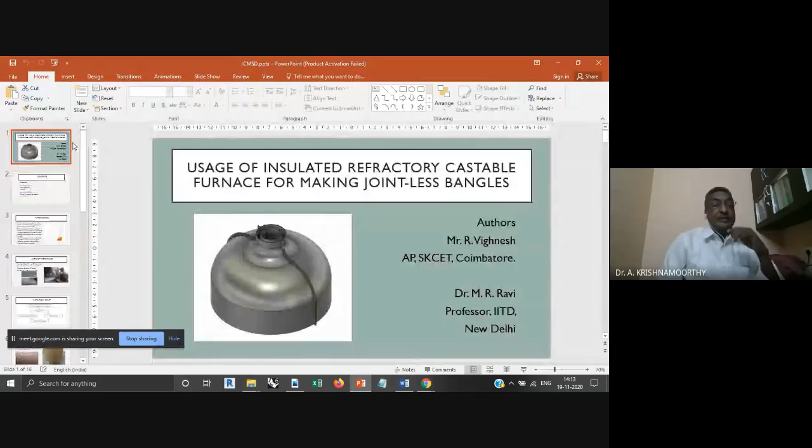Usage of insulated refractory castable furnace. Okay, so can I start? Please proceed. Good afternoon, everybody. My name is Vignesh, and I'm an assistant professor working in Sri Krishna College of Engineering and Technology, Coimbatore. I'll be presenting my topic on usage of insulated refractory castable furnaces for making jointless bangles. I've done this study along with Dr. M.R. Ravi from IIT Delhi.

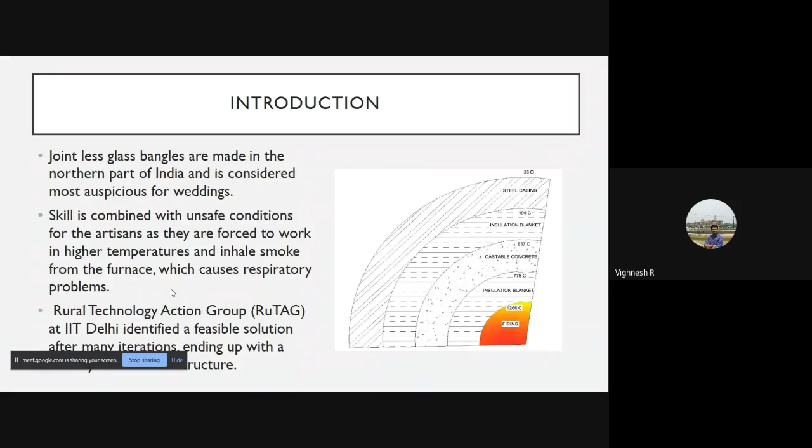So the introduction. Bangles are used in wedding ceremonies, which are considered to be really traditional in the northern part. In the northern part, they make jointless bangles, which require more skill compared to the jointed bangles that we see every day. These are made of glass. The problem is it requires more skill, and it has difficulties in terms of the temperature which comes out of the furnace, and also the gases that they inhale from the process.

So those two things were really hampering the efficiency of the artisans who make the glass bangles. So RuTAG, a body in IIT Delhi, identified this particular problem, and they also came up with a solution for making the life of the artisan a little better.

So they came up with this solution called a furnace, a 4-layered furnace, which is used to make the bangles, but the furnace will not let the high temperatures come out of the whole apparatus, and also the flue gases will not be coming out, so they won't inhale it. So that's the whole idea.

They have done it with 4 layers, as you see in this photograph that I've given on the right hand side. So the 4 layers consist of these things. Insulation blanket was the first and the third layer. The refractory castable concrete was considered to be the second layer. It's actually concrete. So the fourth layer was steel casing, which housed the whole apparatus.

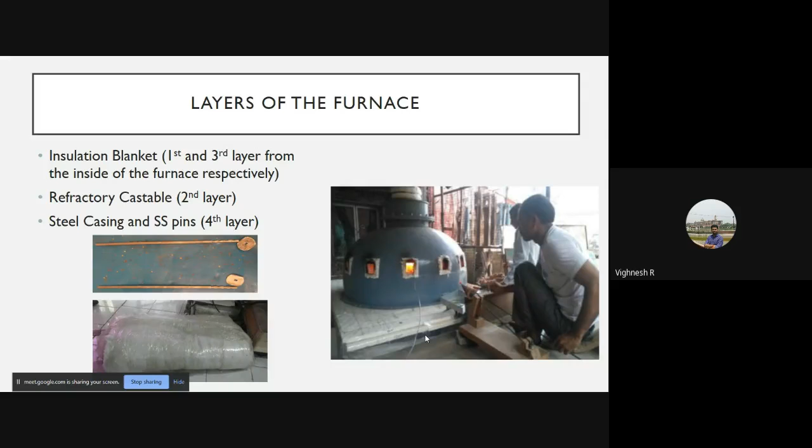That's the first idea. We have a literature review which was done, covering the iterations which were made, and then we started and we selected the materials. We did the analytical testing, physical testing, and I will discuss the design and discussions right now.

So the first thing which I talked about was the field visit to Khurampur. Khurampur is a village in Haryana. So IIT Delhi, along with its professors, came up with this solution for making pottery and all that. The problem with this was it was made up of natural materials. Natural materials did not have the capacity to resist high temperatures, and this resulted in cracks over the walls

that you see over here. So in order to reduce the cracks, they came up with another solution to fix steel wires all around. But that again proved to be a fatal mistake, because we have studied in temperature loading that if the material is free to expand or contract, there is no stress on it. But if we restrain something, if we put a fixed end on both sides, then stresses will come out of that.

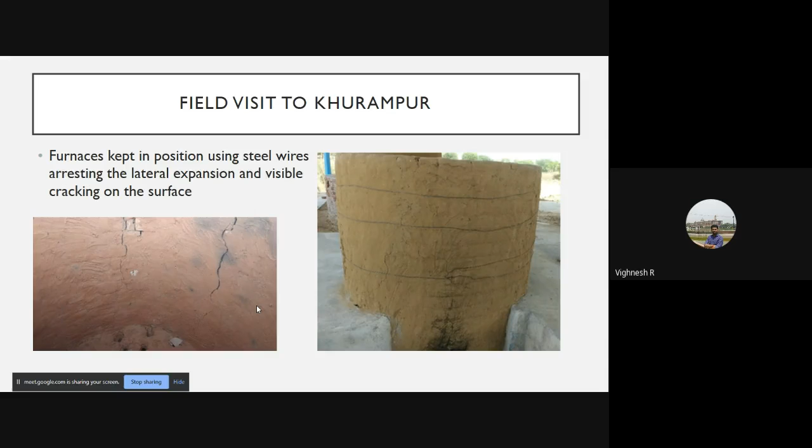So natural materials was not a very good option, and this was the second furnace which they made. It was made up of red brick bond, which you see over here, and it was actually better than the first iteration. But the thing is, it could not sustain the temperature. The temperature was not sustained, so it required more fuel. It reduced in its efficiency.

Therefore, the one thing which we learned from these two furnaces was that natural materials alone cannot be used for making this furnace, because it did not have the capacity to withstand the higher temperatures, and also to hold the temperature at a constant level, steady state. So that's why we selected the materials based upon these parameters, which are called refractoriness and PLC, which is like the deformation. PLC is permanent linear change, and these two parameters were essential in selecting the materials.

Right? So as I said before, we had four layers, among which one was the insulation, and the second layer was the refractory castable concrete. So in order to do that, we shortlisted Whytheat and Cerachem blanket as the refractory castable and the insulation respectively, because they had a very good refractoriness value, and also the PLC was a little bit lesser. Okay, that's why we have chosen these two materials.

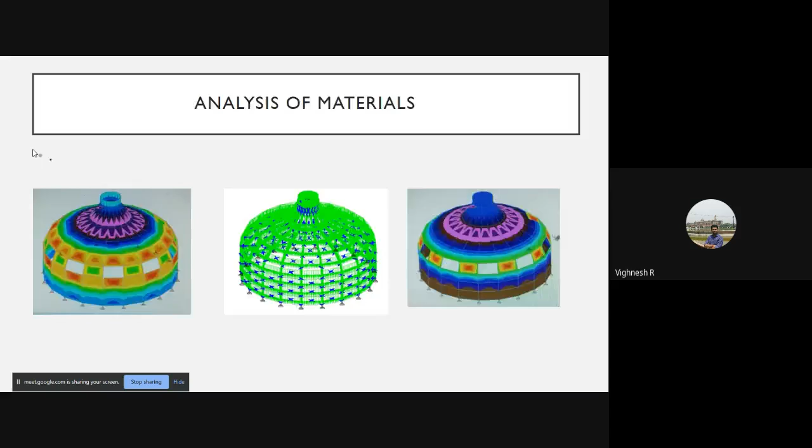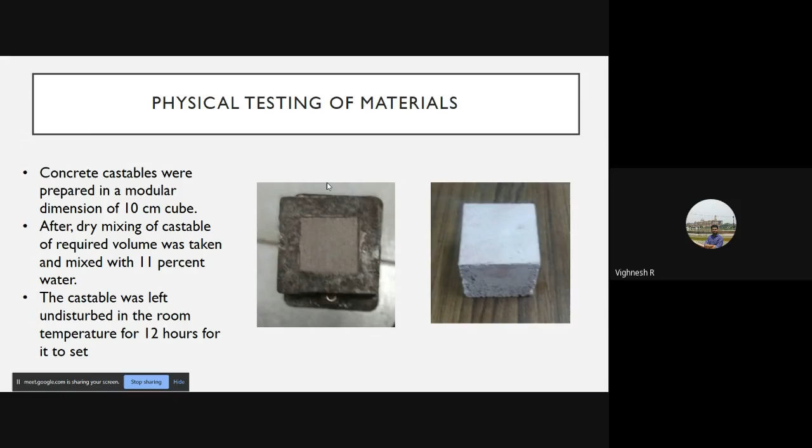The curing part was really different. As civil engineers, we usually cure structures using water. For refractory castables, we required heat. This cube was kept inside this furnace, and the curing requires many steps. First, heating it to 100 degrees Celsius for 1 hour, then keeping it in a muffle furnace at 1100 degrees Celsius for about 2 hours, then keeping it at 200 degrees for an hour or so, and then at room temperature for 1 hour to finish the curing. So that was a little different.

After curing, we took the specimen and rolled it in an insulation that you see over here. It represents the practical situation inside the furnace: the castable is sandwiched between two layers of insulation, as you saw in the first photograph. We kept it inside the muffle furnace and applied a temperature loading of 1100 degrees for about 5 hours, then took it out and kept it at room temperature for the remainder of the day. So it's a temperature loading cycle, similar to what happens in the field when the artisans melt the glass.

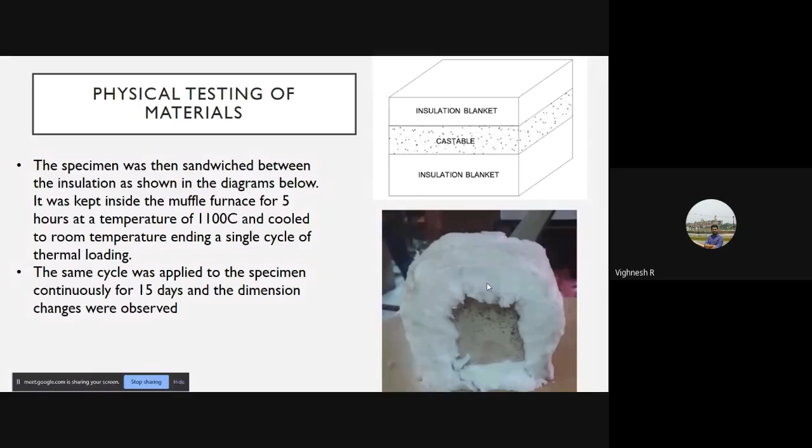They do it for 5 hours, and then the whole process stops for one day, and then the next day they do it again. So this cycle was done for 15 straight days, and the dimensional changes were observed, and it came out to be very good. The dimensional changes were really, really less compared to what we expected. So it was about 2%. The maximum value was 3%, which was given in the brochure.

So actually, what we wanted to test out was whether it can withstand the harsh temperatures that it can be subjected to. So it came out really well. So the conclusion is the furnace consisted of 4 layers. The first and third layers consisted of these insulation blankets. Second layer, refractory castable concrete. The fourth layer is just a housing kind of arrangement. It is based upon steel, and steel being a very good conductor was considered to be the fourth one. Not the first or second, it's the fourth one.

And the materials for the castable as well as the insulation were selected using two parameters: refractoriness and PLC. And we did an analytical model of the same thing, and we found out it doesn't really require any amount of reinforcement. Very little reinforcement was required, but we have to note that it was subjected to heat directly. In practical situations, we have the blanket or the insulation to protect it from the direct heat. So that is why we did not have any reinforcement for the castable concrete. Physical testing showed that it was good enough to withstand harsh environments, and that was what I wanted to say right now.

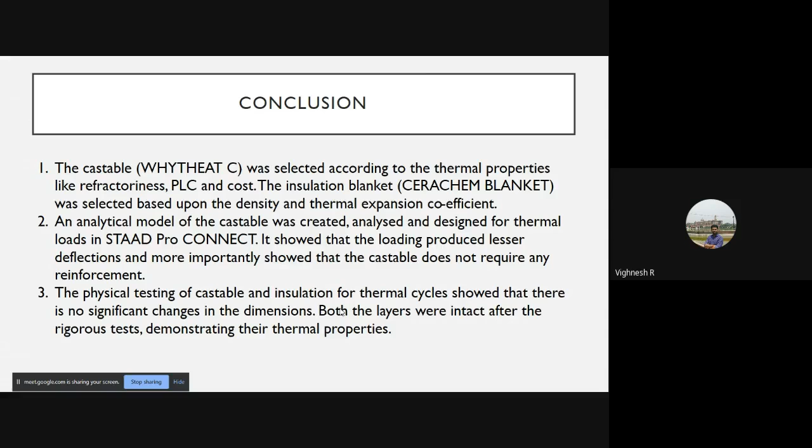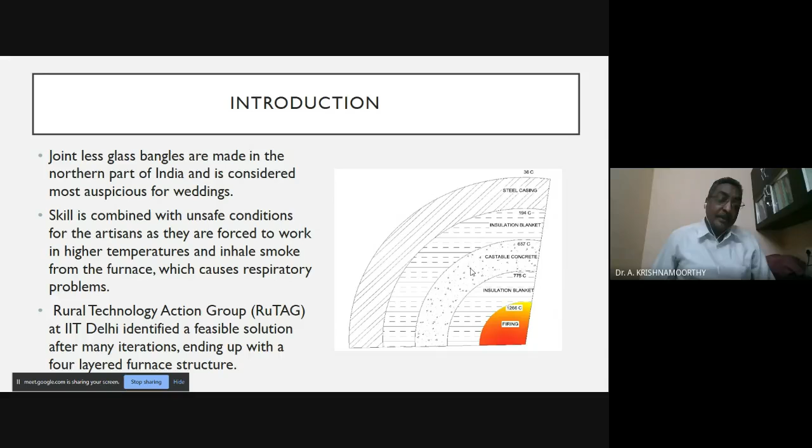Okay, the layers you have given, the first layer, second layer, third layer, is it from inside or from outside? Inside. You are coming from the heat zone to the layer. Okay. Did you make any analysis by changing the material in the different layers, I mean the stacks? You did it only on software, right? Yes, sir, we have done it in STAAD Pro initially.

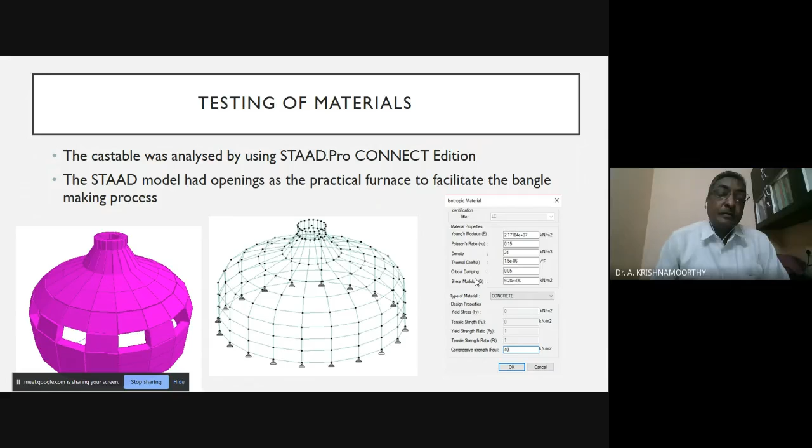The arrangement, the first, second, third, did you change the arrangement and see any difference? No, sir. Actually we did not do it in layers. Only the castable concrete was subjected to the heat. We did not include the layers. We just wanted to see how it behaves individually rather than the sandwiched way that we wanted to design. The worst case scenario, sir. Okay, worst case scenario. Then you did it analytically, and practically you measured it? Yes, a little testing also, sir.

So what would be the temperature loss you have measured? How much percentage? Temperature loss, sir, from inside to outside. Inside it was about 1300 degrees. When it comes to the outside environment, it can be in the range of 40 to 50 degrees, sir. 40 to 50 degrees. Okay.

Because there are only some things we can do. If we include another layer, then cost-wise it won't be really feasible, sir. Because IIT does it for the welfare of these people, they could not do much about another layer. This itself was a very big layer, so four layers itself is a big one. They are doing it practically in IIT, sir. They have built it and they're going to transport it to Purampur, and they will be testing it again.

So because of continuously maintaining the temperature, you were able to take out bangles without joints? Yes, yes. Jointless bangles. We have a video for that also, sir.

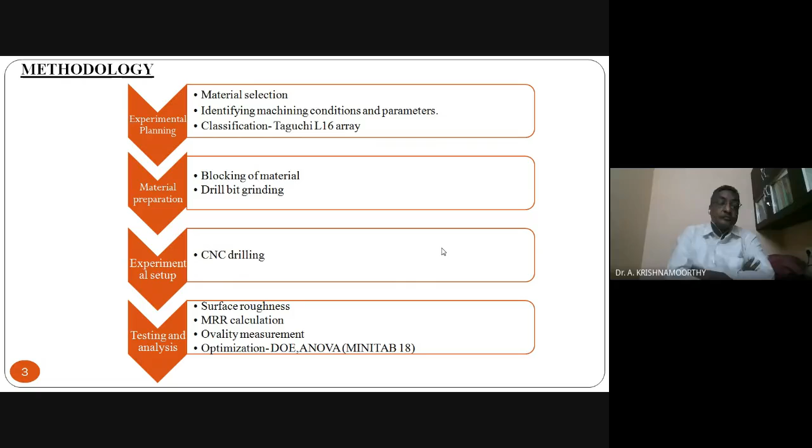In the experimental methodology that I followed, the initial step is the material selection. As I mentioned earlier, very few works are done on SS410 material, and it has very wide applications in the automotive and marine industries and other fields, which is the main reason I selected SS410 material.

The second step is identifying the machining conditions and parameters. Since it is drilling, I selected the input parameters speed, feed and point angle, and with the help of machining parameter charts and other online research works, I selected a certain set of parameters. For the optimization process, I'm using a Taguchi L16 array for this work.

The second stage of the work consists of blocking the input material, SS410, and then grinding the drill bit to the respective point angle. The next stage of the experiment was CNC drilling. I used a CNC BFW machine for the drilling operations, and the analysis was done after that.

The series of testing operations that I followed was the MRR calculation, ovality measurement, and the final DOE analysis and ANOVA analysis using the Minitab software. So these are all the main methodologies I have followed throughout the research work.

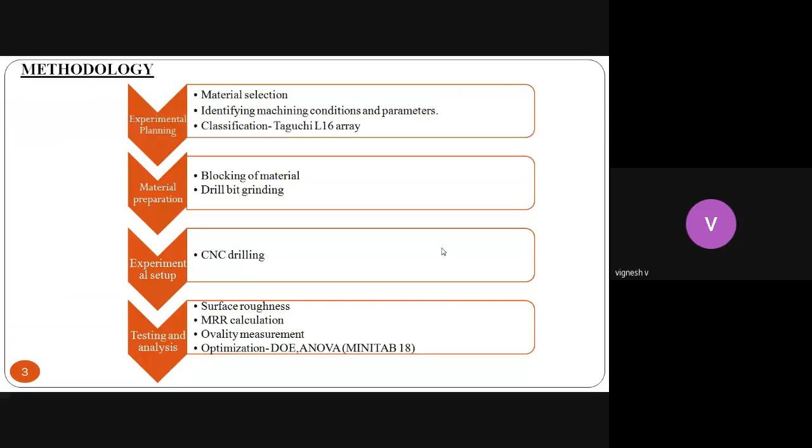As I mentioned earlier, it has very wide applications in marine industries and also in other fields like automotive industries, and a wide variety of applications in bolts, screws, bushings and nuts, shafts, pumps, valves, etc. We need to analyze how it works, what the machinability of that material is, which parameters are suitable, and what the trend of the parameters is that can directly influence the machining properties. We need to know all those factors for a perfect machining analysis or the perfect machining condition.

And why drilling? Because drilling has a wide variety of applications and very little work has been done on drilling operations. We know that drilling is one of the most familiar machining operations used in the automotive industries, marine industries and many other related industrial sectors.

And why did I use an HSS drill bit? The main reason is that it is very economically beneficial, it is mainly used for drilling some hard materials, and it is somewhat heat resistant. To make the machining operation more economical and more beneficial to industry, I have chosen the HSS drill bit as my tool.

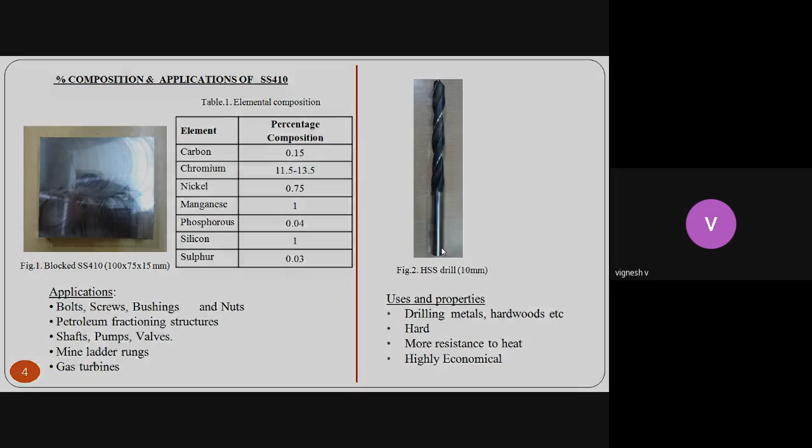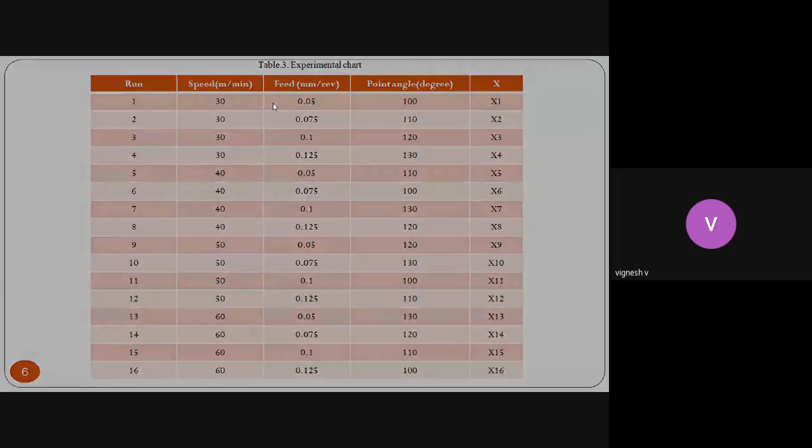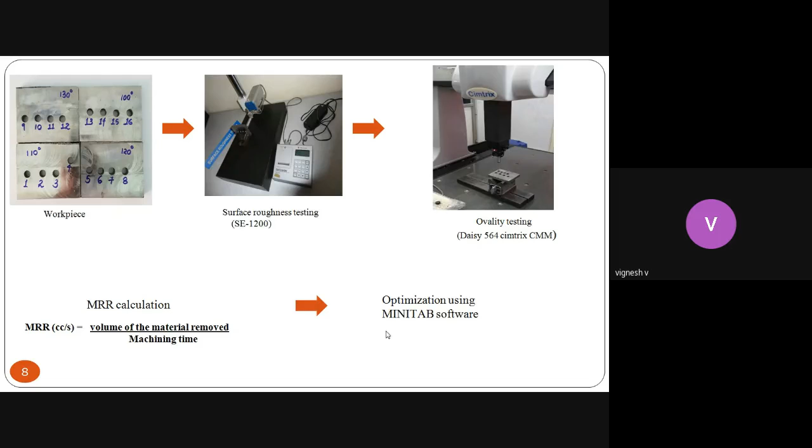Then I did the surface roughness testing, the ovality testing, and the material removal calculation. After getting the results for the 16 sets of experiments, I used an optimization technique in the Minitab software to get the final result.

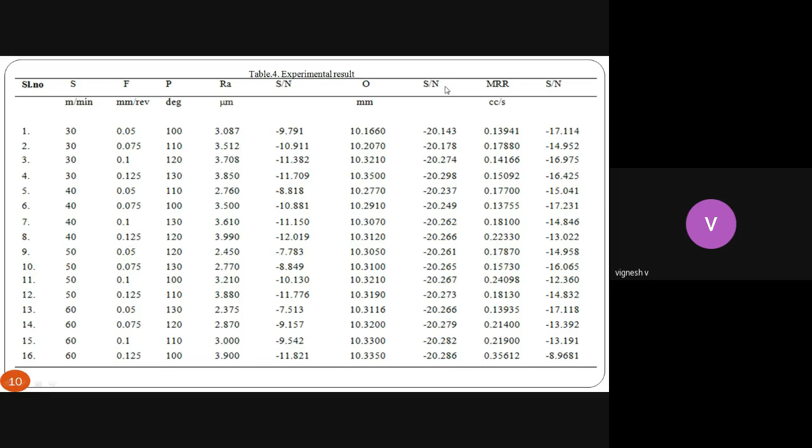And these are the result tables that I found with the help of the Minitab software. You can see the 16 roughness values and the corresponding S/N ratios obtained with Minitab. In the next stage, you can see the corresponding 16 ovality values and their respective S/N ratios. And the final one shows the MRR and the corresponding S/N ratios.

Each output parameter, such as surface roughness, MRR and ovality, is analyzed separately. From the Minitab software we get plots, which really help to identify the optimized condition and also the trend of the parameters. As mentioned in the objective, I need to correlate the input parameters with the output responses and analyze the trend of those parameters with respect to the response.

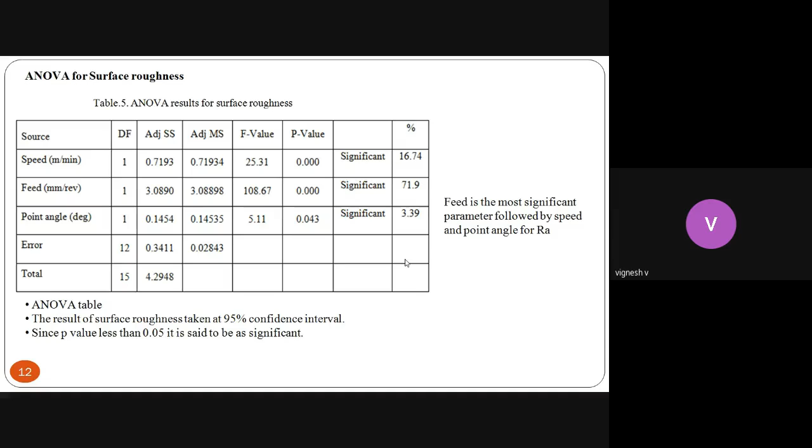And by seeing that percentage, we can analyze which one is the most significant parameter out of the three parameters chosen. So the ANOVA results suggest that the feed is the most influential parameter for the surface roughness, followed by speed and then the point angle. So the point angle is the least influential parameter for the surface roughness. And the ANOVA analysis was done at a 95% confidence interval, that is, out of 100, 95% will obtain the true mean values throughout the operations.

So after the Taguchi analysis, I conducted a regression analysis also using the Minitab software. The main reason for conducting the regression analysis is to get a prediction model, that is, a prediction regression equation. When we get that regression equation and use some values of speed, feed, and point angle, we can predict the roughness value in the machining operation. So if we randomly take some speed, feed, and point angle, we can predict the roughness value. That is the main prediction we can get using this regression analysis and this prediction model.

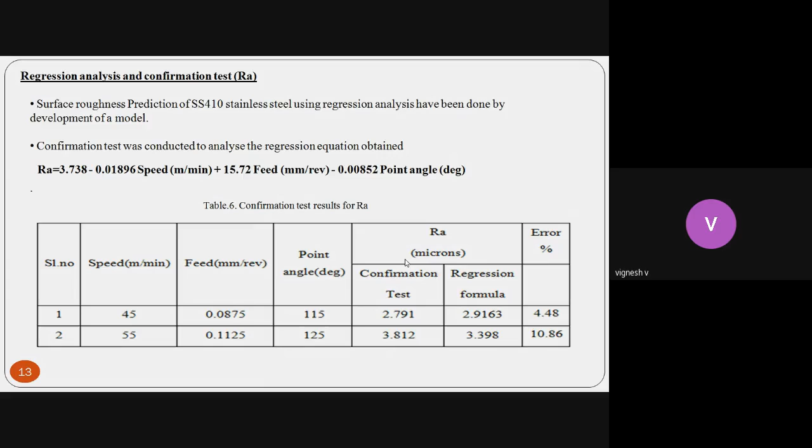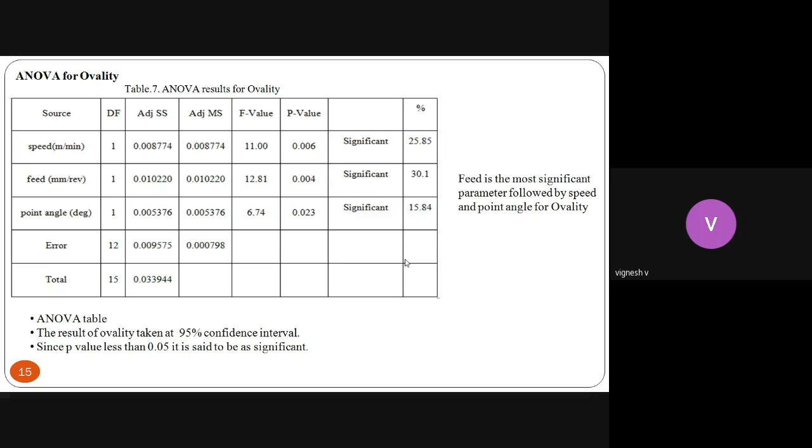And the same procedures were followed for the ovality. The S by N ratio will help to identify the optimized condition, and the mean will help us to identify the trend, and we'll get wide varieties of combinations. We'll get a combination of speed, feed, and point angle, where experiment number 1 is the most optimized condition out of the 16 experiments. And using the ANOVA table, we are able to identify which is the most significant parameter, the most influential parameter, and the least influential parameter. And the same 95% confidence interval was followed during the ANOVA analysis.

And the regression analysis was also conducted during this experiment, and a regression equation was generated, so that we can predict the ovality when we apply some random values of speed, feed, and point angle.

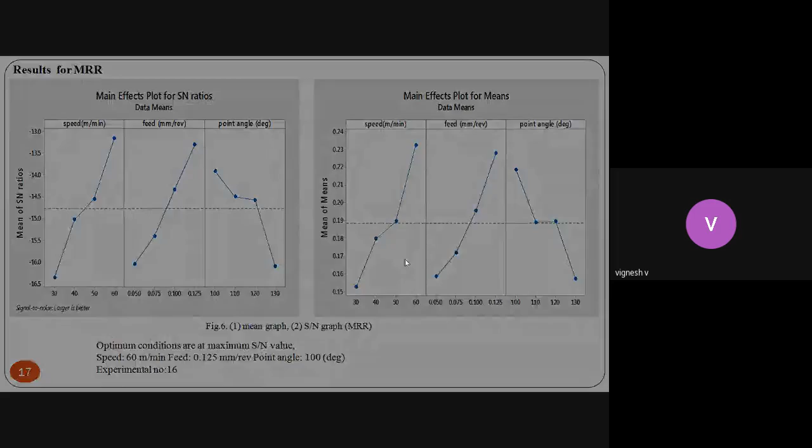Then in the case of MRR, another output response, we again followed the same procedures, and we get a maximum optimized value, and we are also able to identify the parameter strength. We identified that experiment number 16 is the maximum optimized condition for that set of experiments. And while comparing the other two, in MRR the speed is the most significant parameter, followed by the feed and the point angle. So these are all the analyses obtained by doing the ANOVA analysis, and by doing the regression analysis, we can get the predicted value of MRR by using some random values of speed, feed, and point angle.

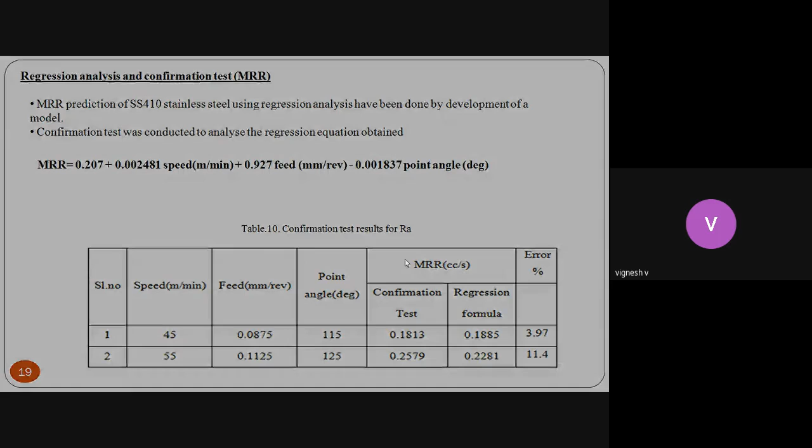In the case of MRR, the speed and feed are directly proportional, but the point angle is inversely proportional. ANOVA revealed that the speed has the highest significance on MRR, followed by the feed and point angle. We can also conclude that ovality is directly proportional to speed, feed, and point angle, and ANOVA revealed that the feed has the highest significance and the point angle has the least significance on ovality.

The prediction of the responses is also possible with the help of this model. All this analysis was done to analyze the prediction of the model and also the trend of the parameters.

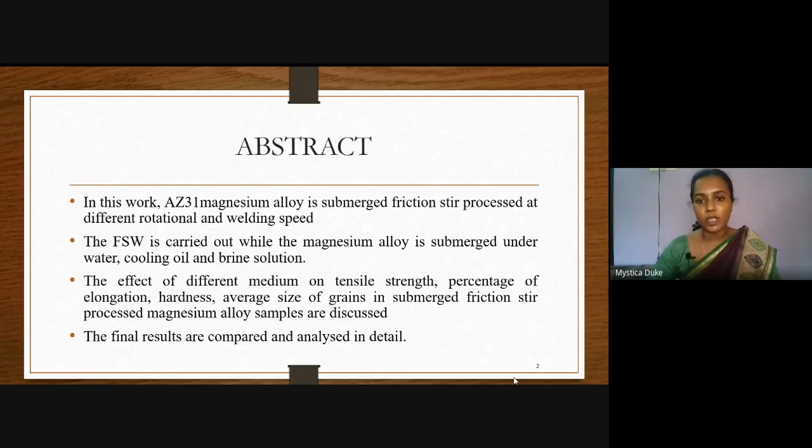Friction stir processing is a surface engineering technology, a surface treatment used to alter the grain structure of any material. Materials like magnesium have a coarse grain structure, which is a disadvantage and does not allow magnesium to be used in many applications. So we have used friction stir processing to alter the grain structure of magnesium. We do this by taking a third body, a non-consumable tool, which moves along the surface of the material, here AZ31.

The tool rotates and moves transversely on the surface of the material. This rotation causes plastic deformation by the stirring action, and friction develops between the tool and the workpiece, generating heavy heat. Due to this plastic deformation along with the heat, the stir zone is developed with finer grains. Normal AZ31 has coarser grains, and friction stir processing converts them into finer grains. You can see the schematic layout here.

So why do we need a refined grain structure? A refined grain structure tends to improve the mechanical properties of any material, basically ductility. Magnesium alloys are lightweight, but their ductility and formability are very poor, which hinders their use in many applications. Friction stir processing produces fine grains that improve the ductility of this magnesium alloy. So we have performed friction stir processing by submerging it in different media.

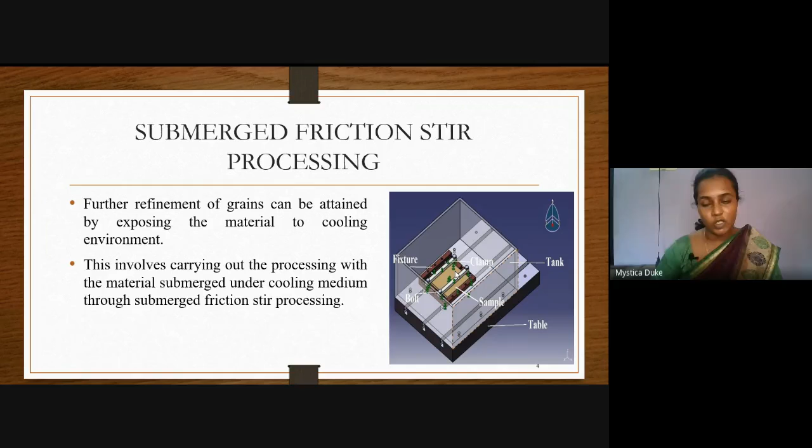So this submerged friction stir processing is nothing but submerging the whole setup inside a tank and filling the tank with whatever medium we choose. So we have done extensive literature survey. Here I have mentioned only a very few important takeaway points. So Wu et al. in their paper talk about how magnesium is very lightweight and has high strength to weight ratio, and it has the capability to replace aluminium in many applications. But because of its poor formability and ductility, it could not. So we chose magnesium as a material for this study.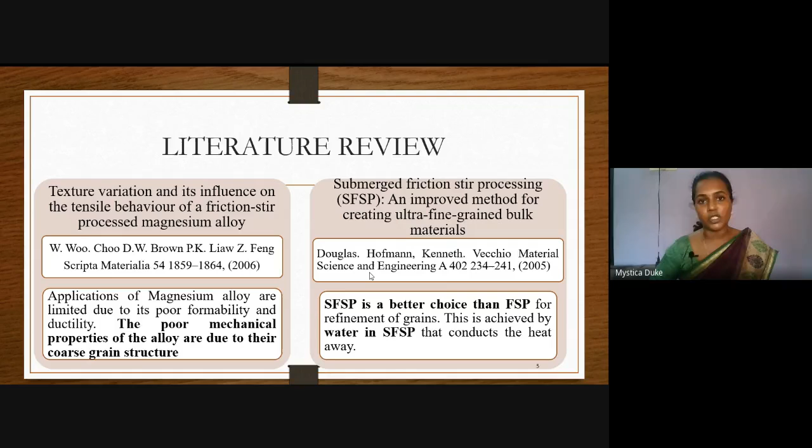Next, Douglas et al. in their paper talk about how submerged friction stir processing provides better grains than normal friction stir processing. And Basil et al. in their paper talk about how the submerged friction stir process reduces the peak temperature and the time this material is exposed to the peak temperature, thereby providing refined grains. And Liu et al. in their paper talk about reducing the size of the heat affected zone. That is nothing but reducing the softened region and developing finer grains.

So the takeaway from the literature review was, first, as I told, we saw that the magnesium alloy needs to get improved ductility. So we chose magnesium alloy for this study. And we found out that submerged friction stir processing is better in producing refined grains when compared to friction stir processing. So we went with submerging the friction stir processing setup. Next, we have seen that the coolants chosen so far in submerged friction stir processing are only water, and sometimes cryogenics, but they have not explored any other coolants. So we went with other coolants. Here we have used water to compare, and we have used brine solution and cooling oil.

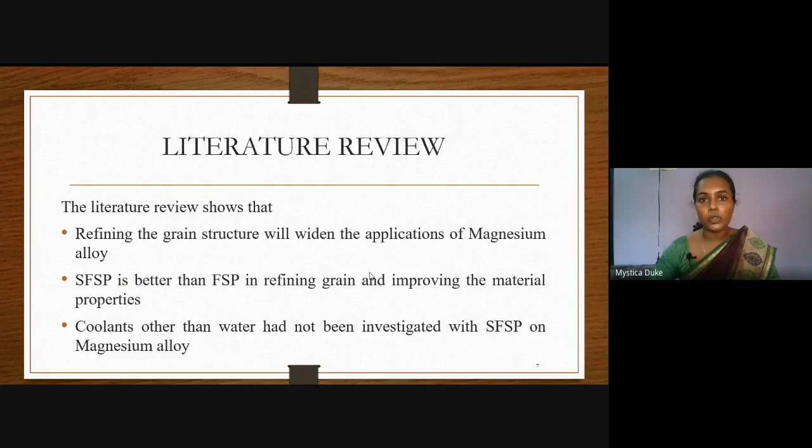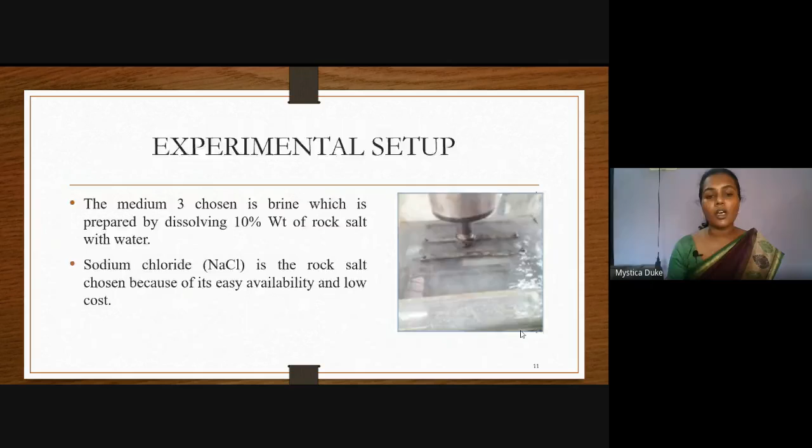Then this is the first medium, which is water. The initial temperature was recorded as 30 degrees Celsius. Here you can see the second medium, which is nothing but the cooling oil. Cooling oil is nothing but the metal cutting oils which we normally use. We mixed it with water in the ratio of 1:10. Next, here you can see the third medium, which is nothing but the brine solution, which is 10% of NaCl mixed with water. So we conducted friction stir processing with all these 3 mediums. We took the samples and conducted a few other tests to analyze how these 3 mediums influence the mechanical properties of these samples. First, we studied the effect of these mediums on the temperature developed during the process.

And you can also see here that the temperature change between water and brine is almost the same in every parameter combination. This is because water and brine almost have the same thermal conductivity, which is 0.6 watt per meter Kelvin. This is why they tend to have the same temperature change. And the minimum temperature recorded was obtained for cooling oil. This is because the thermal conductivity of cooling oil is very high when compared to water and brine. So this is the result we got for the effect of medium on temperature.

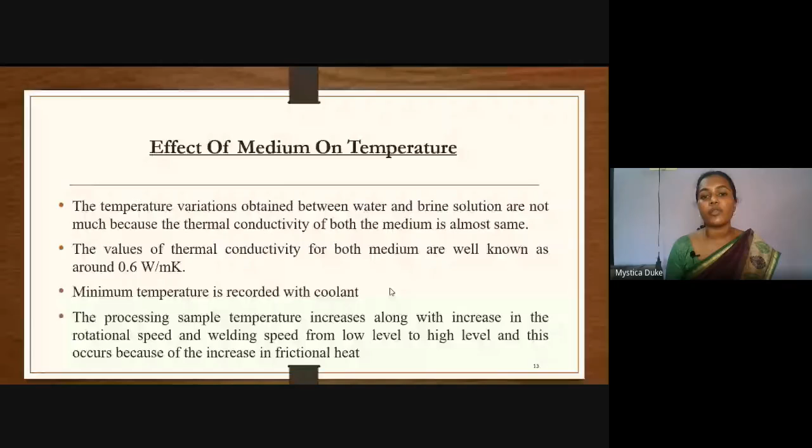Next, we analyzed the effect of these mediums on different tensile properties. We went with ultimate strength and percentage elongation. You can see that the percentage elongation stands for ductility, right? So the ductility obtained is very, very high for each and every parameter combination. For every parameter combination, the elongation obtained is very high when compared to the normal parent metal. So this actually proves that submerged friction stir processing of magnesium alloy improves the ductility, which was the main objective of our study, because every combination produced better ductility.

You can see that the ultimate strength is also maintained almost equal to the parent metal. This too is maintained simultaneously. This is mainly because of the ultrafine grain structure that is developed by exposing the magnesium alloy to friction stir processing while submerging into different mediums. Actually, the coolant oil produced better and maximum elongation and maximum ultimate strength. You can see it here.

At the high parameter combination, the coolant oil produced maximum ultimate strength and maximum elongation. As I mentioned before, the coolant oil takes away more heat, thereby reducing the size of the heat affected zone and also refining the grains further and better than any other medium here. So the tensile properties tend to be better with coolant oil.

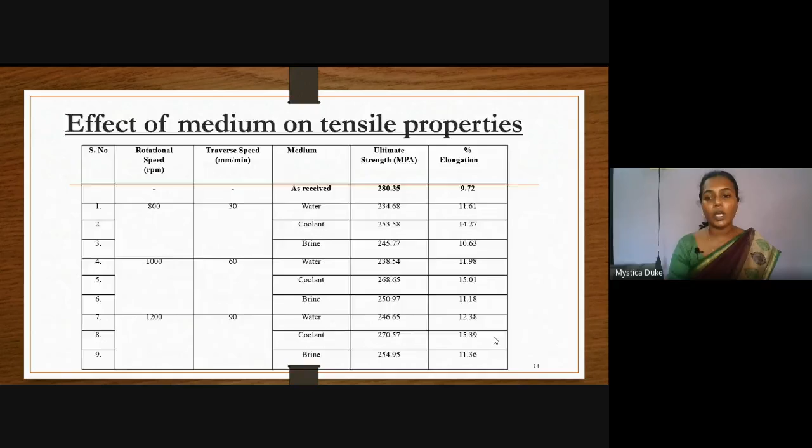Next, we found out the effect of these mediums on hardness. We found out that the hardness kept on increasing with increase in the parameter combination. This happened with temperature also. Here you can see that with increase in the parameter combination, the temperature also kept on increasing. This is because with the increase in rotational speed, the tool tends to move much faster. So the frictional heat developed is also very high. Because of this, the temperature kept on increasing with increasing rotational speed and welding speed. The same happens with hardness too.

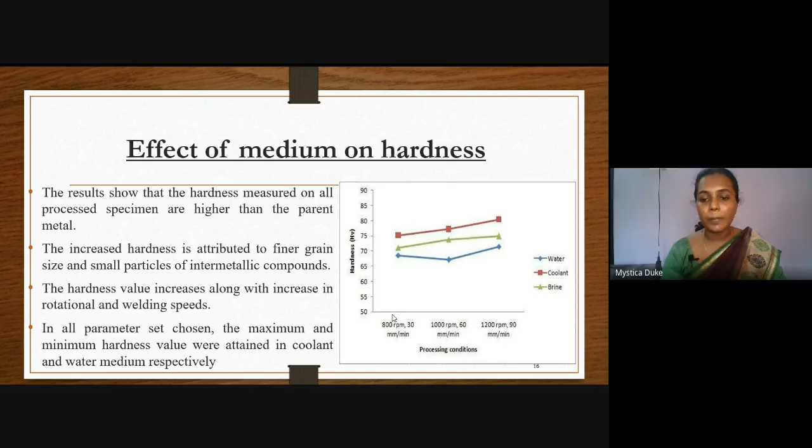Here you can see again the coolant produced higher hardness for all the parameter combinations. This is again attributed to the finer grain structure that is developed in the material. Because with finer grain structure, the hardness obtained increases, as we know already. And with the parameter combination, the hardness also kept on increasing.

And these are the microstructure SEM images that we got for different samples exposed to different mediums. The base metal had an average grain size of 85.3 micrometer. As you can see, it's very coarse. But exposing to water and friction stir processing reduced the grain size to 5.43, which is a very significant change. This is possible because of the plastic deformation and the heat produced, and also because of the cooling. With normal friction stir processing, you could reduce the grain size, but not to this amount. Only because of this cooling could we obtain such a significant decrease in the grain size.

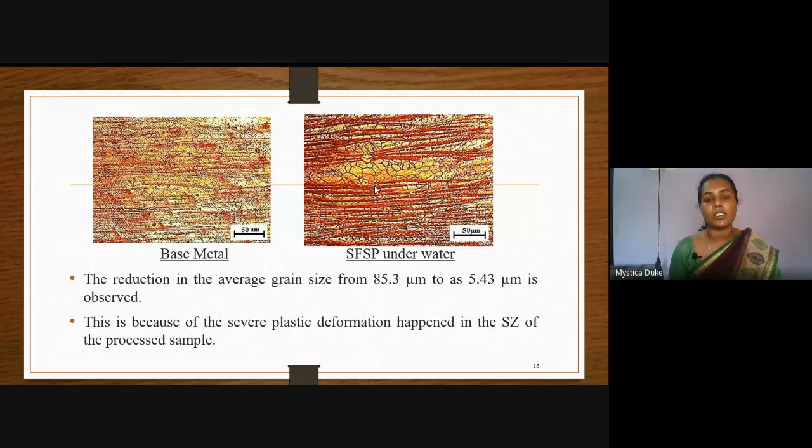And with brine, the grain size further decreased to 4.51 micrometer. And with coolant oil, we almost got an ultra refined grain structure. Here you can see how refined the grain structure is, and the grain size reduced to almost 2.3 micrometer. So the conclusion from our study is that these three different mediums provided different peak temperatures. So depending upon the result you desire, you can use whichever medium you need.

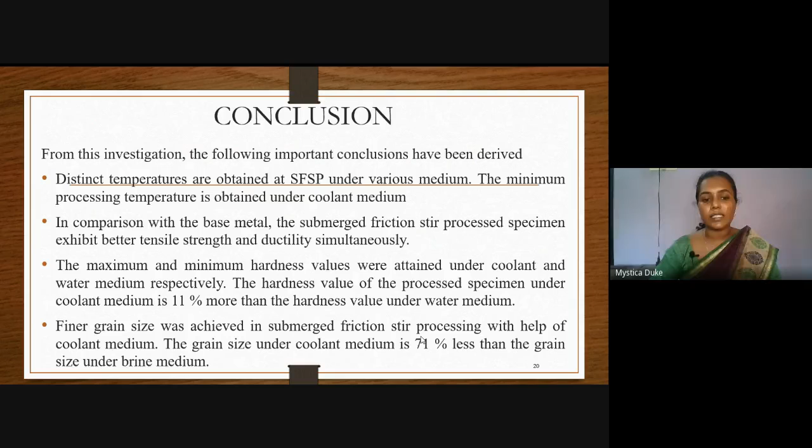And we saw that the coolant oil especially had the tendency to maintain better tensile strength and ductility simultaneously, which is actually very hard to achieve. This was achieved by using coolant oil. The hardness value was also higher using coolant oil, about 11% more than the hardness obtained under water medium. And the grain refinement was also higher for the coolant medium, with the grain size reduced to about 71% less than the grain size using brine medium. So these are the conclusions from our study, and these are a few of the references we have used for our study.

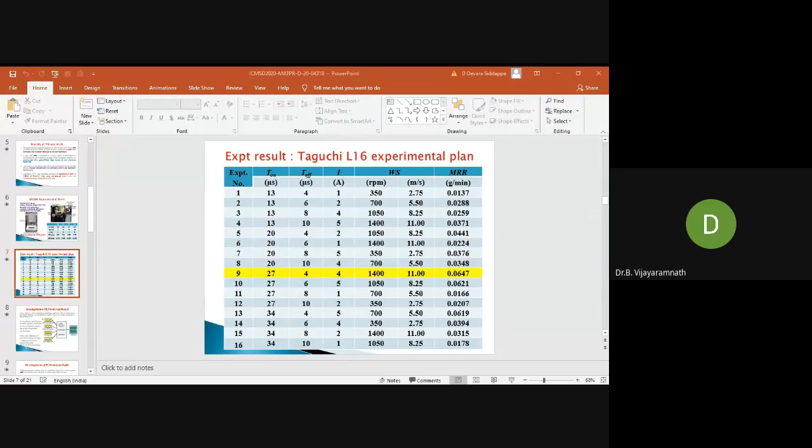Okay, let me go to the first one, sir. No, introduction not necessary. You just continue. Okay, sir. So you continue with the novelty. Where did I stop? You continue, it is visible.

Okay, sir. In this work, basically, we have attempted to model the material removal rate as one of the responses of WEDM process during machining of titanium alloy. The novelty of the present work is that the machining equipment itself, that is the WEDM setup, uses reusable wire technology, which is seldom researched by the researchers. So in this case, we have considered 4 different process parameters: pulse on time, pulse off time, current, and wire drum speed. Actually, it is expressed in RPM.

As I told you, the machine setup uses reusable molybdenum wire technology, which is less reported in the literature. And also, the modeling of MRR in WEDM process using molybdenum wire is less researched. Machining setup and also response considered with the wire combination is also less researched. Yeah, this is the experimental setup. Experiments are conducted at BMS College of Engineering, Bangalore. Molybdenum wire of 0.18 mm diameter is used here. The 4 parameters were varied at 4 different levels as per Taguchi L16 experimental plan.

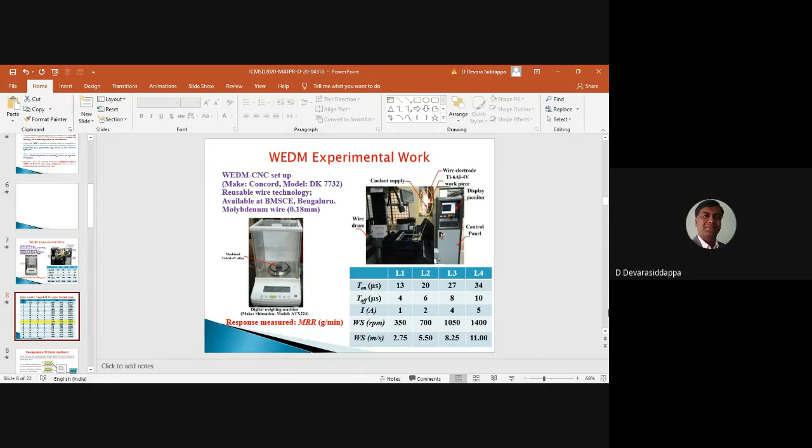These are the experimental results obtained. As you can see, the maximum MRR we obtained at the 9th experimental setup with 27 microseconds as pulse on time, then pulse off time at level 1, current at level 3, and wire speed at the last level, nothing but the fourth level.

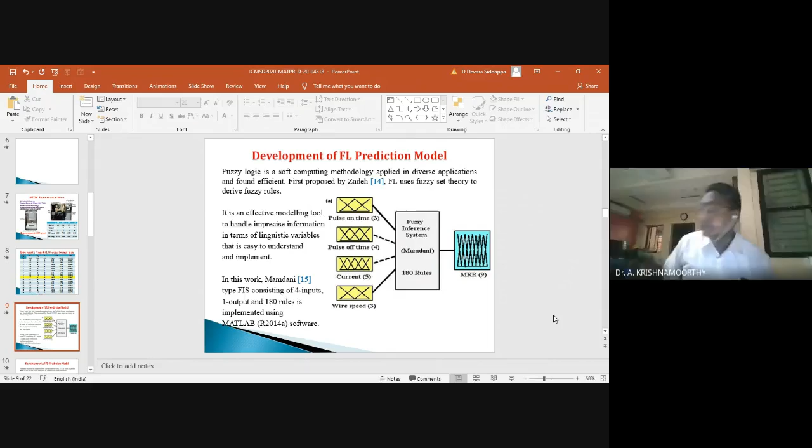This section describes the development of fuzzy logic prediction model in WEDM of titanium alloy. Fuzzy logic is one of the important soft computing methodologies applied in diverse engineering applications and is found efficient. First proposed by Zadeh, fuzzy logic uses fuzzy set theory to derive the fuzzy rules. What is important here is that it is a very effective modeling tool which can handle imprecise information in terms of linguistic variables, which is easy to understand and implement.

In our work, we have implemented Mamdani type of fuzzy inference system consisting of 4 input variables and 1 output, and these are divided into different fuzzy sets depending upon their importance on the MRR. During ANOVA analysis, which is not reported in this work, we found that current is the most influential parameter, hence we have divided this into 5 fuzzy sets, while pulse off time is the second influential parameter. It was divided into 4, and the rest of the 2 are divided into 3 fuzzy sets. In total, the fuzzy rule base consists of 180 rules, used in the fuzzy logic model, implemented in MATLAB using the fuzzy logic toolbox.

Here, because we have 180 rules, we need the MRR values for those 180 data sets, and it is very difficult to conduct experiments to obtain those data sets. The method used here is prediction of MRR using the validated regression model, taken from our published work. This MRR regression model is used to predict the MRR values for the 180 data sets. This methodology is in line with the one used by Abburi and Dixit, in which they used ANN predicted values of surface roughness to construct the rule base of a fuzzy logic model in turning process. We used the same methodology, but instead of ANN, we used the validated regression model.

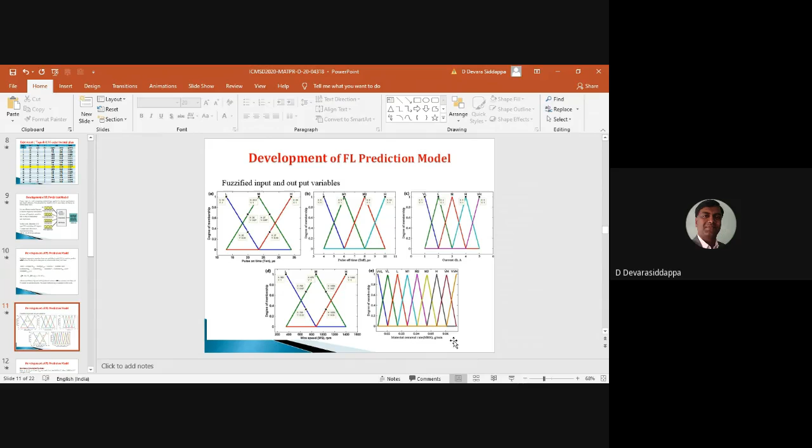The next part is the result and discussion. To start with, the first is the validation of the fuzzy logic model. The developed fuzzy logic model is validated with 5 different experimental data sets, which of course are not used in the development of the model. As you can see, the fuzzy logic model predicted with better prediction accuracy.

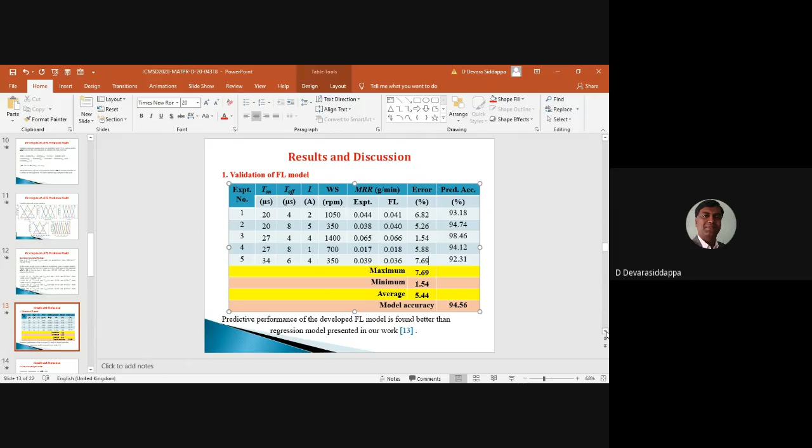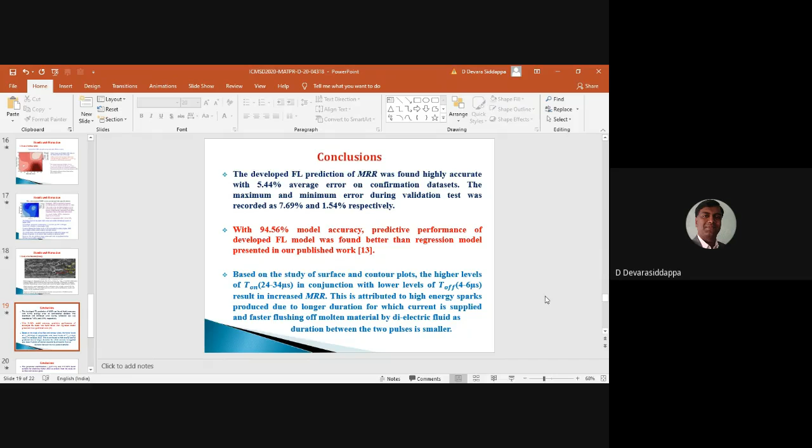Continuing with the conclusions, for the parameter combination of current and wire speed, here also higher values are desirable in order to get higher MRR, as evident from both the surface plot and the contour plot. Hence, it can be concluded that higher levels of current and wire speed are desirable to achieve maximum MRR, and this is due to faster machining with high energy pulses, which melt the workpiece material, giving a higher material removal rate.

In respect of the SEM surface morphology study, we have observed cracks and craters on the machined surface, and this is due to high intensity sparks impinging on the workpiece for a larger duration, drawing more current. That higher value of current is responsible for craters and cracks on the machined surface. So these are the concluding points from my research work.

As future extended work, a similar fuzzy logic modeling methodology can be adapted to model other performance measures like surface roughness, power consumption, kerf width, etc. And similar prediction models can be developed using other soft computing techniques, and the results can be compared with the present study.

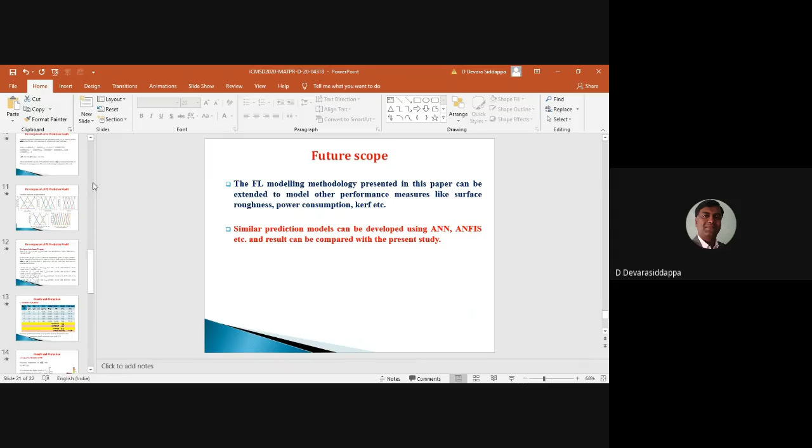Then the weight, based on your experience, you allotted 0.56? No, sir. Actually, in most cases researchers take the weight as 1 by default. But what I did here, instead of assigning weight equal to 1, I have taken the membership grade of the output variable as the weight. So in different cases the weight value varies. In the first case, the membership grade of MRR in the very low fuzzy set is 0.56, and the same is taken. In rule 10 the weight comes as 1, and in rule 180 the weight comes as 0.8. So that is the logic behind taking this weight, sir. Okay.

Okay, sir. So anyhow, it is already published work with the regression model, right? Yeah. The regression model result is published, and the result we got through this fuzzy logic is better than that regression. And that regression equation is used here to predict the MRR values for 180 data sets. Okay. Now you are concluding that with the higher current and the longer duration, the surface also got damaged, right? There are some cracks and voids, cracks and craters on the machined surface.

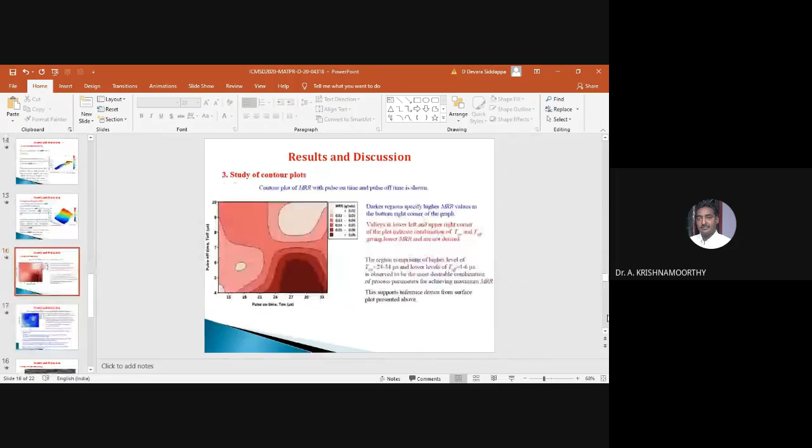Okay. So depending upon the thing, we have to have this selection, sir. That means optimization of process parameters is required, considering all the responses, not only MRR, but also the surface roughness and other parameters. Okay. Yeah, other parameters we need to optimize, and there we have to study the surface morphology. Okay. Thank you. Thanks for your presentation.

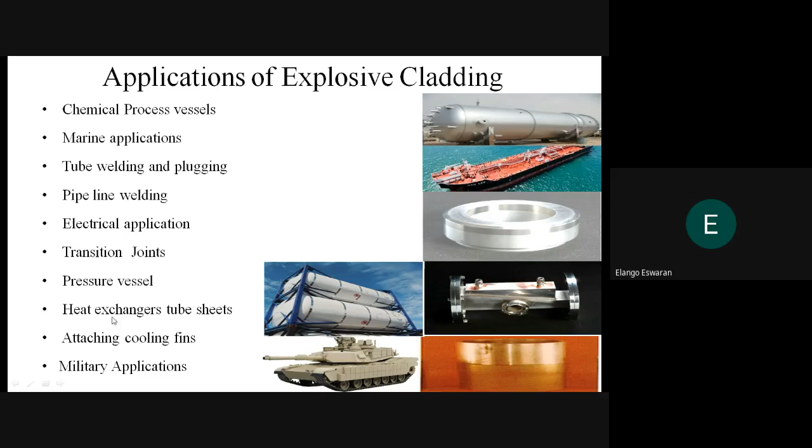So good afternoon to all, sir. My research topic is optimization of operational parameters in aluminum 5052 SS316 explosive cladding. Overview: introduction, objective, explosive cladding, experimental condition, discussion, and conclusion. Applications of explosive cladding are chemical process vessels, marine applications, tube welding and plugging, pipeline welding, electrical applications, transition joints, pressure vessels, heat exchanger tube sheets, attaching cooling fins, military applications, etc.

Explosive cladding, a solid-state autogenous metal joining technique, employs an explosive force to craft an electron-sharing metallurgical bond between dissimilar metals. Controlled energy of a detonating explosive is used to create a metallurgical bond between two or more similar or dissimilar metals. As the explosion is initiated, the flyer plate is accelerated by the detonation pressure and flies at a very high velocity towards the parent plate. Quality of an explosively produced weld primarily depends on the state of the interface between the participant metal and alloy.

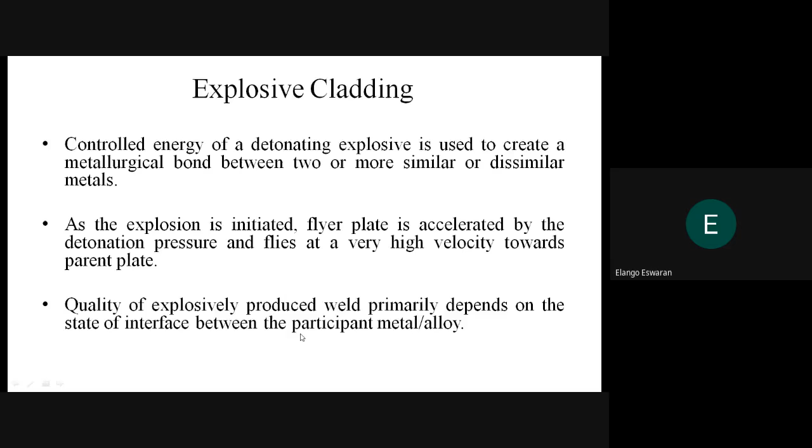The objective of the study is to explosively clad aluminum 5052 SS316 clad metals with and without interlayer, to develop a mathematical model for predicting the strength of the clad, to determine the optimal condition through response surface methodology, that is RSM, to determine the tensile strength of the explosive clad. In explosive cladding, a piece of metal is made to strike another under very heavy impact force, and the clad between them is achieved. Large sized components of difficult to weld metals are cladded by explosive cladding.

When the electrical detonator was detonated, the potential energy stored in the chemical explosive is instantaneously converted into gas, which propagates a shock wave in the flyer plate. This leads to an oblique movement of the flyer plate colliding onto the base plate and the generation of shock compressed gas between the plates. During the collision with the base plate, the kinetic energy of the flyer plate is converted into thermal energy. The energy spent at the interface determines the degree of plasticity at the interface and thereby influences the characteristic interfacial undulation. In explosive cladding, the detonation of chemical explosive forces the flyer plate to collide with the base plate to craft a metallurgically strong joint in a very short duration of time.

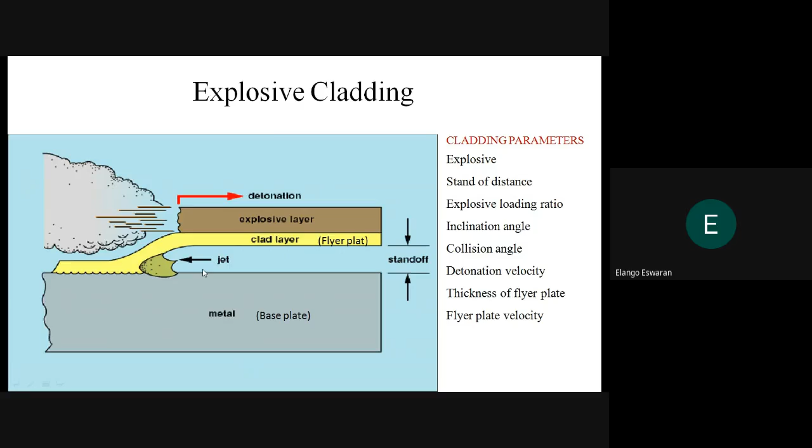Explosive cladding with the interlayer. Explosive cladding is a bonding process in which the energy released from the detonating chemical explosive is employed to create a metallurgical bond between two or more dissimilar metals. On detonation, the potential energy stored in the chemical explosive is converted instantaneously, that is below 50 microseconds, into kinetic energy due to movement of the flyer plate.

The amount of kinetic energy spent at the interface dictates the formation of a smooth wavy interface. As the process is very rapid, that is within a few microseconds, the judicious selection of process parameters, that is loading ratio, standoff distance, property of explosive and the flyer plate, etc., dictates the kinetic energy spent at the interface and restricts the intermetallic compound formed.

Okamoto et al. emphasized the significance of kinetic energy spent at the interface and deduced an empirical relation which depends largely on the flyer plate velocity and the mass of the participant metal. And also Tamilselvan et al., while cladding titanium and steel, concluded that the formation of the detrimental intermetallic compound is imminent when the kinetic energy spent at the interface is high during the conventional two-layer cladding, that is without interlayer.

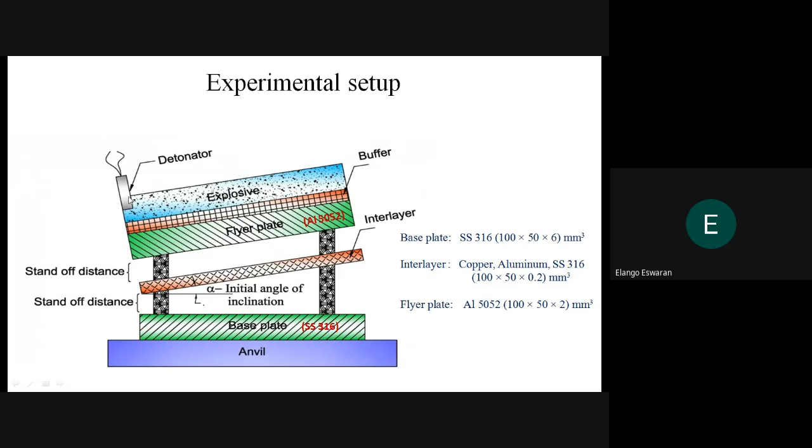The next one is the interface strength in explosive cladding. In explosive cladding, the interface strength and the characteristics are dictated by the optimal selection of operational parameters, viz. standoff distance, loading ratio, inclination angle, and the interlayer. The optimal selection of process parameters results in a higher tensile strength. However, the strength will be reduced if the operational parameters were not selected properly.

To aid the selection of operational parameters, various researchers developed two-dimensional numerical models, design of experiments, mathematical models, and the weldability window. Researchers adopted response surface methodology, that is RSM, to evaluate the tensile and the shear properties of copper–low carbon steel explosive clad. Similarly, Tricarico et al. evaluated the length of the intermetallic layer, microhardness, and shear properties by regression equation, while cladding aluminum and steel.

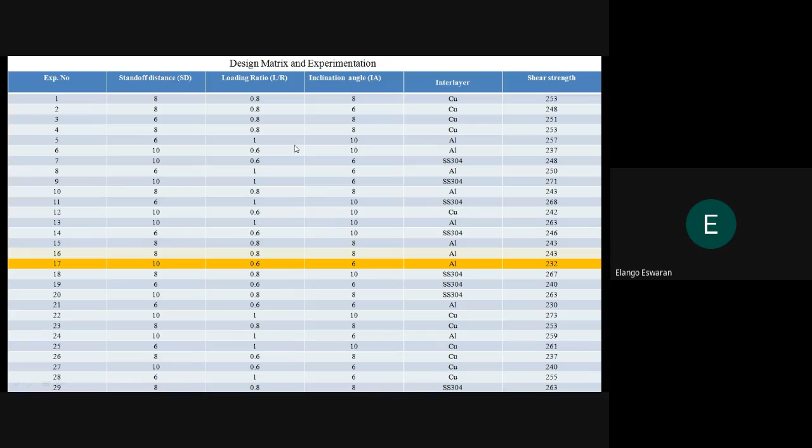And the next one. This slide shows the consolidated ram tensile strength of different interlayered aluminum steel explosive clad corresponding to each experimental condition. As per the 4-factor 3-level orthogonal array, we are conducting 30 experiments. Sorry, so this is not visible.

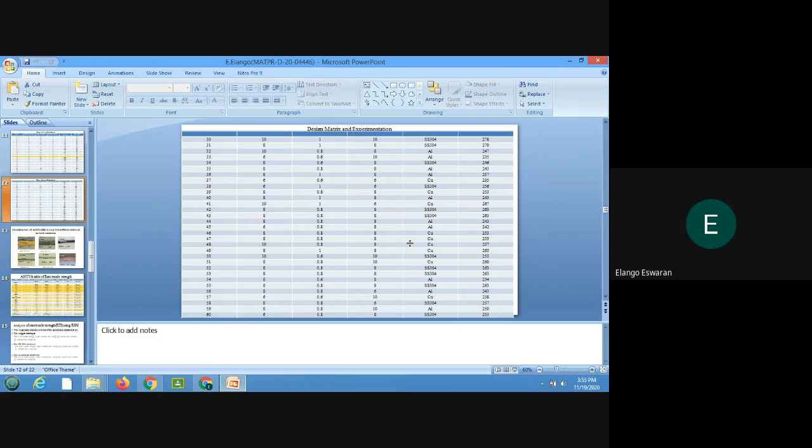However, the test of significance of the parameters is tabulated here. It is witnessed that all the chosen parameters hold here.

Sir, quickly conclude, sir. Quickly conclude. Okay, sir. Okay. Yes, sir. 5 minutes.

It is witnessed that all the chosen parameters hold a significant effect on the response, besides the square of the SD and inclination angle, and the interaction effect of standoff distance and inclination angle, and loading ratio and inclination angle. The p-value for the regression model is lower than 0.05, that is 95% confidence, which indicates the statistical significance of the developed model. The correlation coefficient R square was 97.76, which indicates 97.76% of the variance is considered in the regression model.

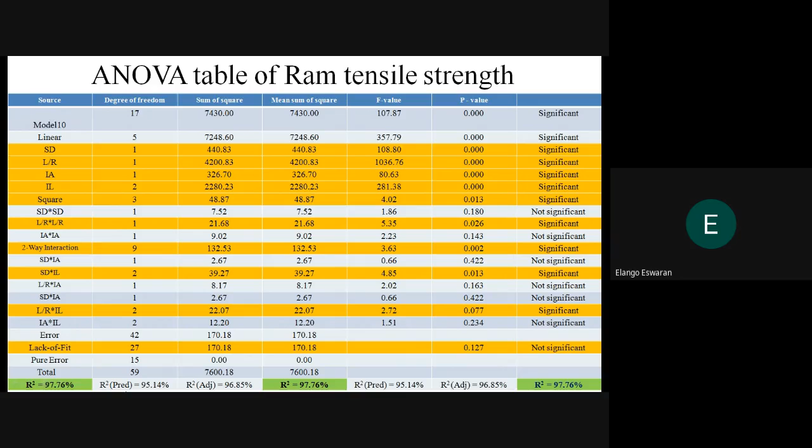The regression analysis of the operational parameters for copper SS 304 aluminum interlayer is shown in this figure. The normal probability plot shows that the residuals of the tensile strength fall near the developed equation, that is the straight line, and the normal distribution of the error is inferred. Hence, it is concluded that the developed regression model is in agreement with the experimental values.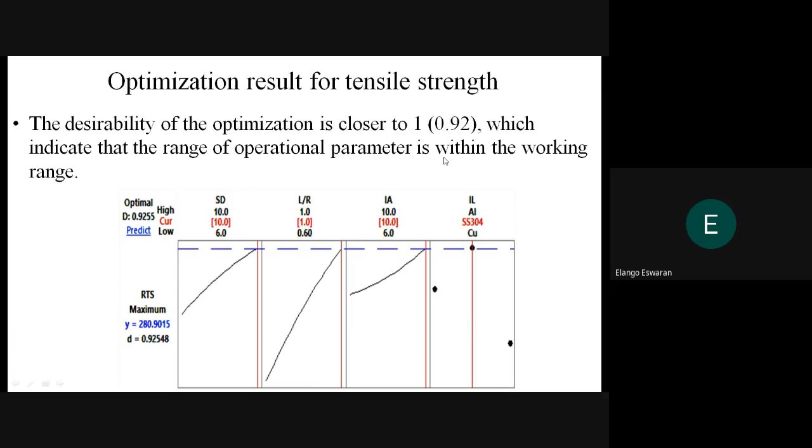The desirability of the optimum is close to 1, that is 0.9255, which indicates that the range of operational parameters is within the working range. The confirmation experiment with the optimum parameter settings and the corresponding tensile strength is shown in the table. The predicted response is very close to the experimental results, and the error is less than 3%. That is, the error is only 2.14%.

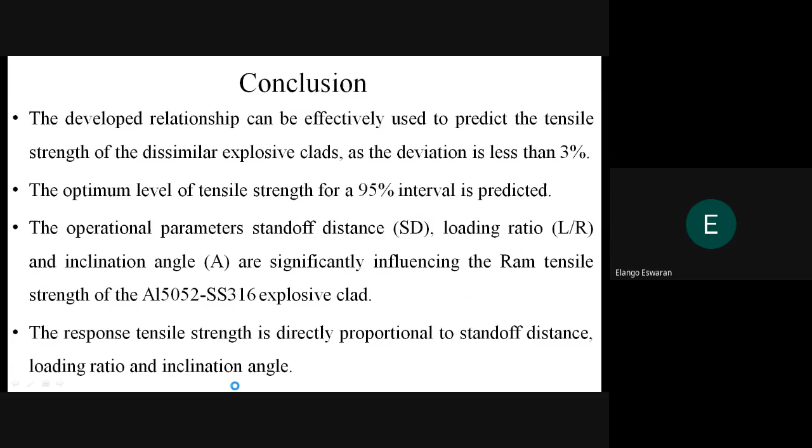Finally, in conclusion, the developed relationship can be effectively used to predict the tensile strength of dissimilar explosive clads. As the deviation is less than 3%, the optimal level of tensile strength for the 95% interval is predicted. The operational parameters standoff distance, loading ratio and inclination angle significantly influence the tensile strength of aluminum 5052 SS316 explosive clad. The response tensile strength is directly proportional to the standoff distance, loading ratio, and inclination angle. These are some references.

Yes, sir. If the quantity is more with the aluminum, what will happen? If the explosive ratio is more? Due to more detonation, the material is spoiled, sir. How did you control that? Depending on the literature survey, sir. Using the literature survey, we chose the range. The detonation velocity of the explosive is 4,000 meters per second. Depending upon the detonation velocity and the mass ratio, we chose, along with the literature review. Based on the literature survey, you chose it. Yes. You have not talked about those things.

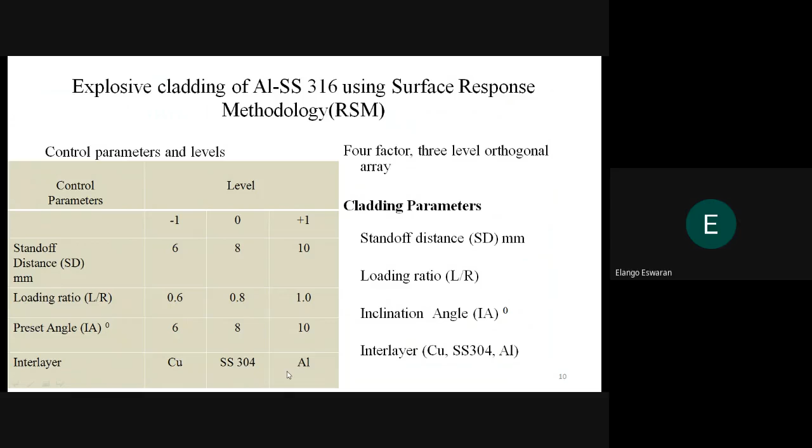Hello. Sir, next. Can you go to the next participant, sir? Next, Devasiddharabha, do you want to say anything? Do you want to ask any question? Sir, yeah. Iswaran, sir. Yes, sir.

Hello. Yes, sir. Sir, what is the design of experiments or experimental plan you have used? Yeah, 60 experiments you conducted. We are choosing a 4-factor 3-level orthogonal array, sir. Your model is a regression model or RSM model, sir? RSM model, sir. And then the experimental plan you have used, 60 experiments, based on what type of design?

RSM is RSM-based, sir. BBD design and CCD design are mainly followed. Based on the RSM, sir. Yeah, I got it. But RSM is a methodology where experiments are obtained as per the design, BBD, Box-Behnken design, or central composite design. I just wanted to know which experimental plan you have used. Central composite design. CCD. CCD design you have used. Yes, sir. That was not mentioned, that's why.

And somewhere I saw that it is mentioned as regression. That's why I got confused whether it's a regression model or RSM model, response surface model. We are getting a regression equation. That's why. Okay, sir.

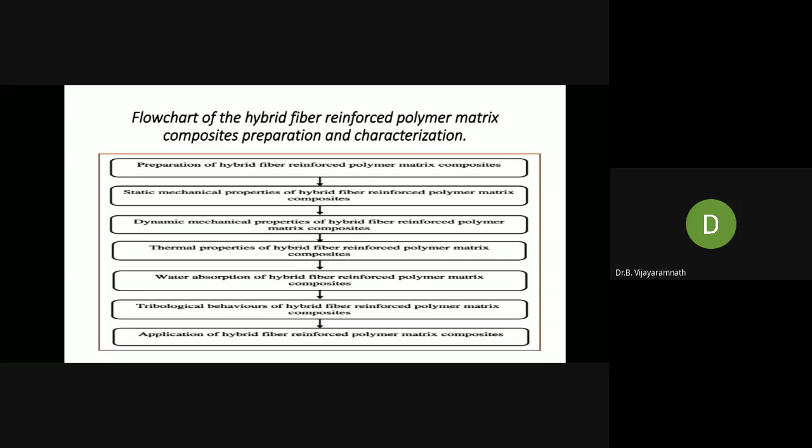Sir, sorry for the interruption. Lakshmi Narayan, sir, it is getting late. You can directly go to your fabrication part and analysis part, sir. Yeah, you're right. Thank you.

These are the materials I have selected. One is the epoxy, the other one is the hardener. The epoxy and the hardener are mixed at a ratio of 10:1. The reinforcements are hemp and Palmyra. The fabrication method is a simple hand layup technique.

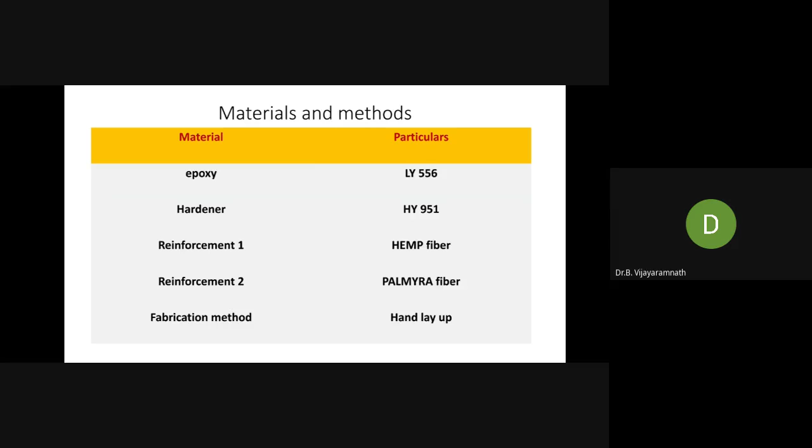I hope I can also skip this.

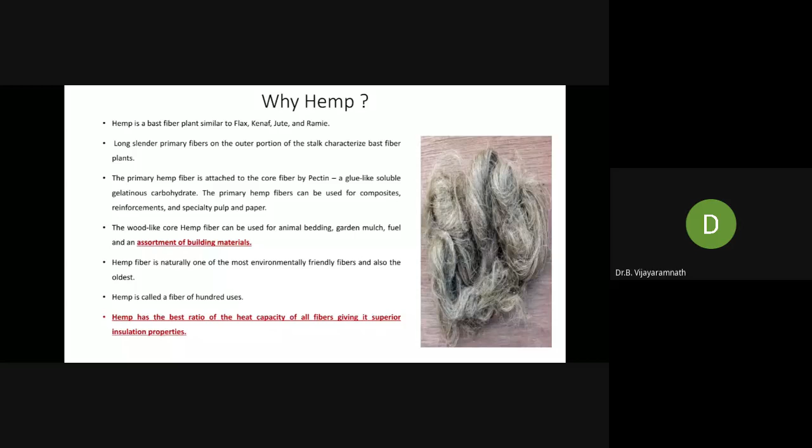Why I have selected hemp fiber, and what is the need of selecting both these fibers? Whatever is underlined in the red color. One is to go with the assortment of the building materials. And one of the most important properties is the best ratio of heat capacity of all fibers, giving it superior insulation properties. That is why hemp is selected here. And also hemp possesses a thermal conductivity of 0.048 watt per meter Kelvin.

Similarly, coming to the case of palmyra, it has a good resistance to heat and mostly it is a chemically resistant type of fiber, which possesses a thermal conductivity of 0.1 watt per meter Kelvin. And the epoxy I have selected, that is LY556, possesses a thermal conductivity of 0.363 watt per meter Kelvin. So these are some of the properties.

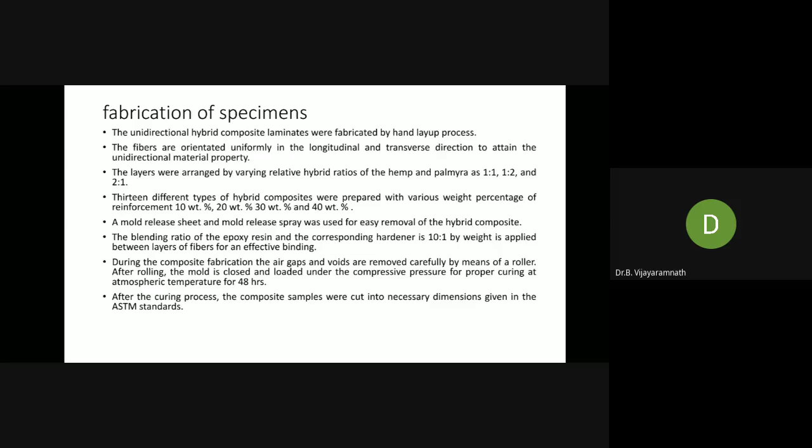In order to conduct the thermal conductivity test, we have prepared specimens as per the standard ASTM E1530, circular disc type specimens, tested on a thermal machine that provides the value of the thermal conductivity. So here you can observe the specimen preparation.

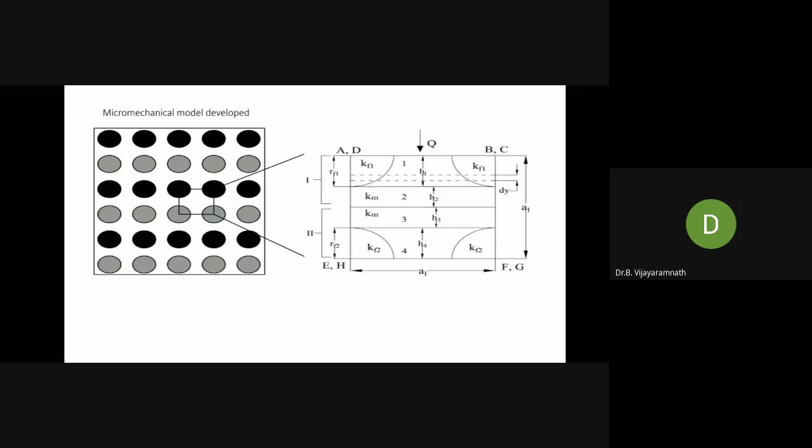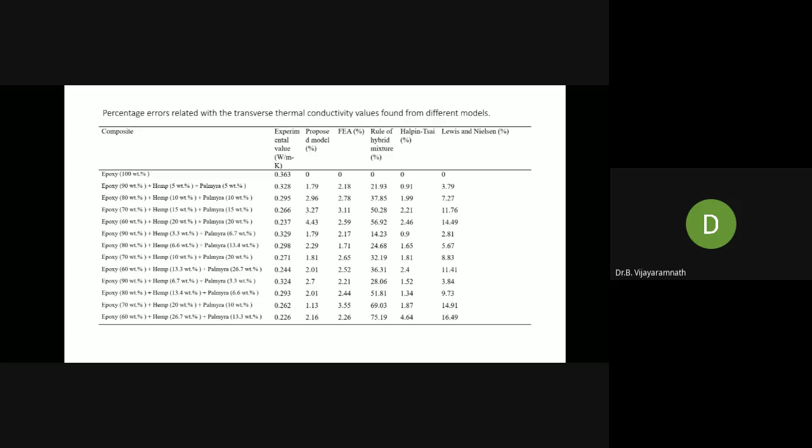In future, we want to also proceed further by providing alkaline treatment to the fibers and once again recheck the values of this thermal conductivity, whether it may get lower than the obtained values from the case of non-alkaline treated fibers.

Thank you for our chairpersons, Dr. A. Krishnamurthy sir and Dr. B. Vijayaramnath sir, HOD Mechanical, Sairam Engineering College. Krishnamurthy sir, you are asking a lot of questions to the participants. They are very keen about your presence, it makes them think about their work, and they have to rectify and correct all the things. That is the motto. Sir gave a lot of inputs for the students to do more research.